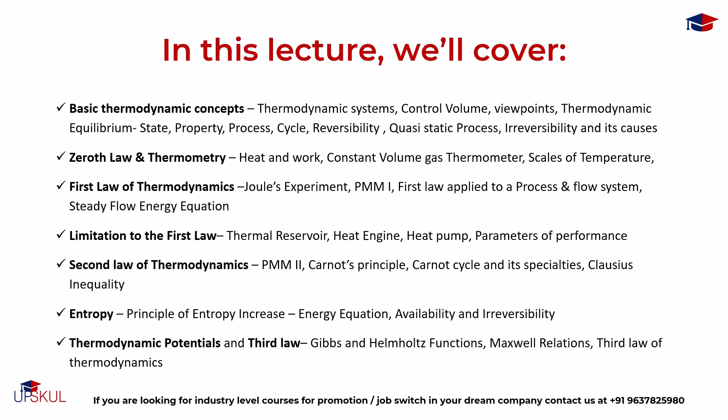We will start this module with the most boring subject, that is thermodynamics. Today we will cover the basic concepts of thermodynamics, Zeroth Law and thermometry, first law of thermodynamics, limitations to the first law, second law of thermodynamics, entropy, and third law, along with real-world applications, and prepare for MCQs and interview questions.

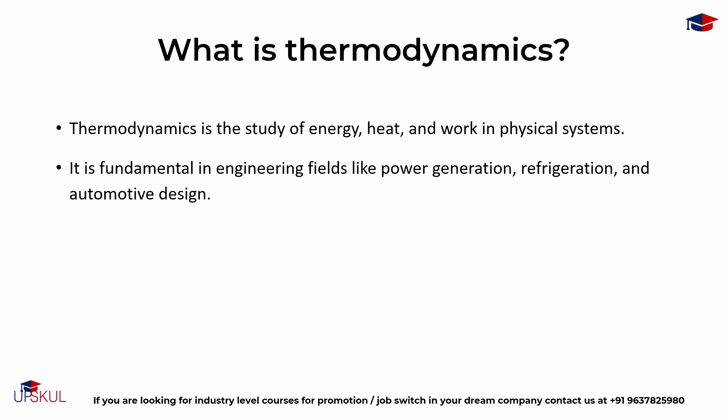A thermodynamic system is defined as the quantity of matter or a region of space which is selected for the study. The mass or region outside the system is called surroundings, and the real or imaginary surfaces which separate the system and the surroundings is called boundary.

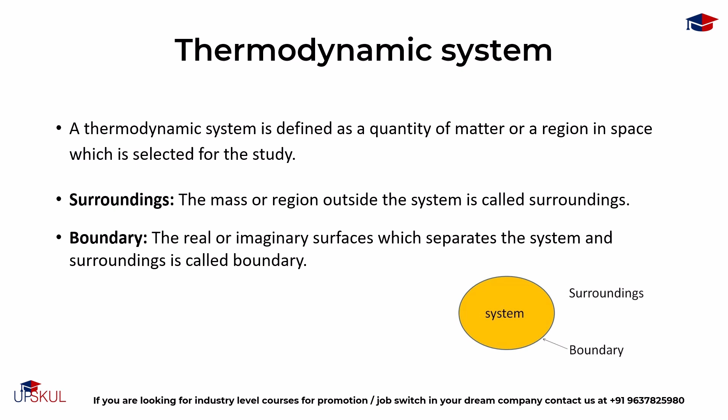Based on mass and energy transfer, the thermodynamic system is divided into 3 types: closed system, open system and isolated system. A system in which the transfer of energy but not mass can take place across the boundary is called a closed system. The mass inside the closed system will remain constant.

For example, boiling of water in a closed vessel. Since the water is boiled in the closed vessel, the mass of water cannot escape the boundary of the system, but heat energy is continuously entering and leaving the boundary of the vessel. This is an example of closed system.

Next, a system in which the transfer of both mass and energy takes place is called an open system. This system is also known as control volume. Boiling of water in an open vessel is an example of open system because the water and heat energy both enter and leave the boundary of the vessel.

Then a system in which the transfer of mass and energy cannot take place is called an isolated system, like tea present in a thermos flask, because in this the heat and mass of the tea cannot cross the boundary of the thermos flask. Therefore, it is an isolated system.

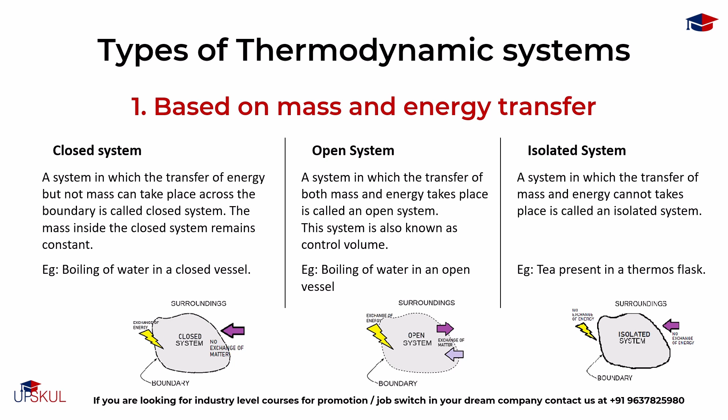Based on composition, there can be homogeneous and heterogeneous systems. A system which contains only one single phase is called a homogeneous system. For example, mixture of air and water vapor. They are both in gaseous form, right?

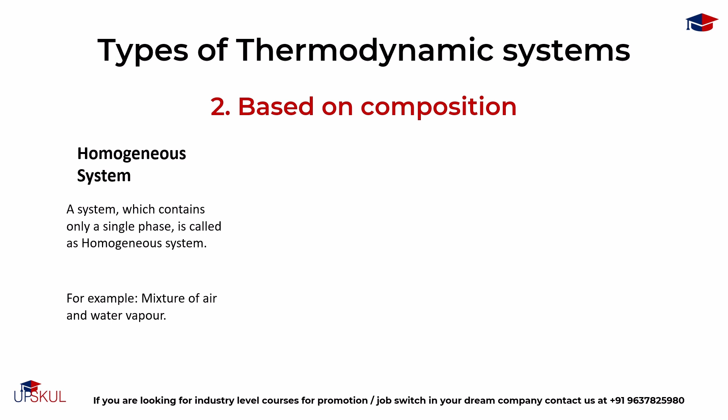Then a system which consists of more than one phase is called a heterogeneous system, like mixture of water and steam. They are both one substance but in different phases.

And then we have the pure substance, a substance with homogeneous and invariable chemical composition, even though change of phase takes place, is called a pure substance. And the simple example of pure substance is water.

Now let's look in detail at what is a control volume.

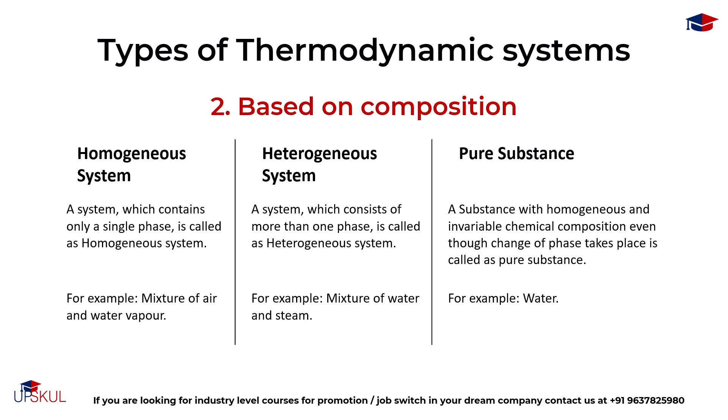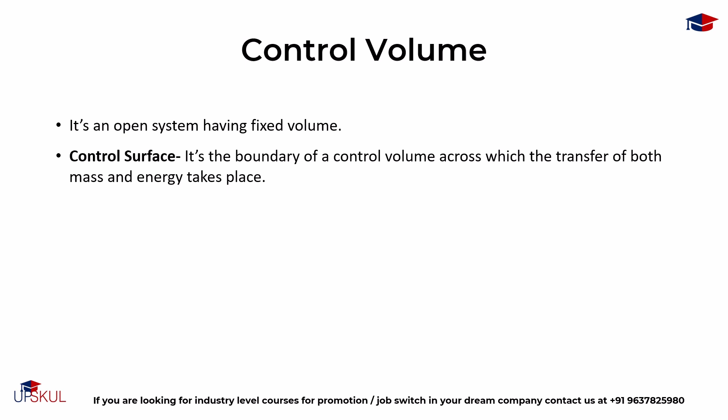A control volume is a system of fixed volume. This type of system is usually referred to as an open system, where mass transfer can take place across a control volume and energy transfer can also occur in and out of the system. A control surface is the boundary of the control volume across which the transfer of both mass and energy can take place. Here, the mass of the control volume may or may not be fixed.

When the net influx of mass across the control surface equals zero, then the mass of the system is fixed, and vice versa. The identity of mass in a control volume always changes, unlike the case of a control mass system or a closed system.

Most engineering devices in general represent an open system or control volume. For example, a heat exchanger, where fluid enters and leaves the system continuously with the transfer of heat across the system boundary. Then there are pumps, where there is a continuous flow of fluid through the system with a transfer of mechanical energy from the surroundings to the system.

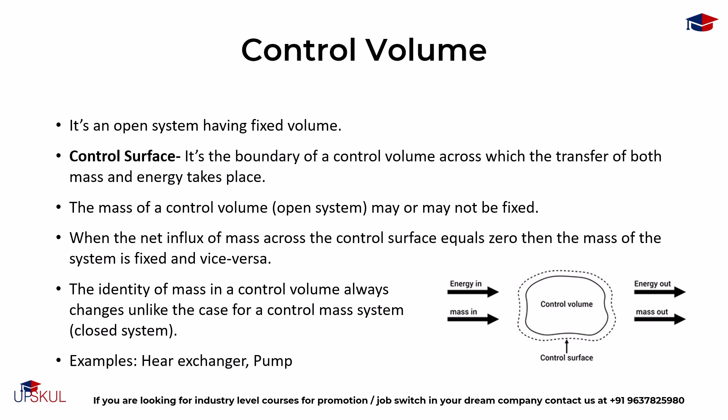Now there are different viewpoints or approaches to a thermodynamic system. In the macroscopic approach, a certain quantity of matter is considered without taking into account the events occurring at the molecular level. Whereas in the microscopic viewpoint, the matter is considered to be comprised of a large number of molecules which randomly move in a chaotic fashion, and the effect of molecular motion is considered.

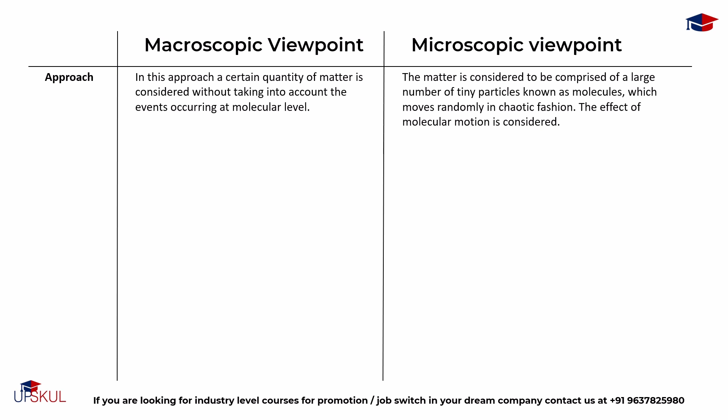In the macroscopic viewpoint, the analysis is concerned with the overall behavior of the system, whereas in the microscopic viewpoint, knowledge of the structure of matter is essential in analyzing the behavior of the system. The application of the macroscopic viewpoint is the study of classical thermodynamics, while the microscopic approach is used in the study of statistical thermodynamics.

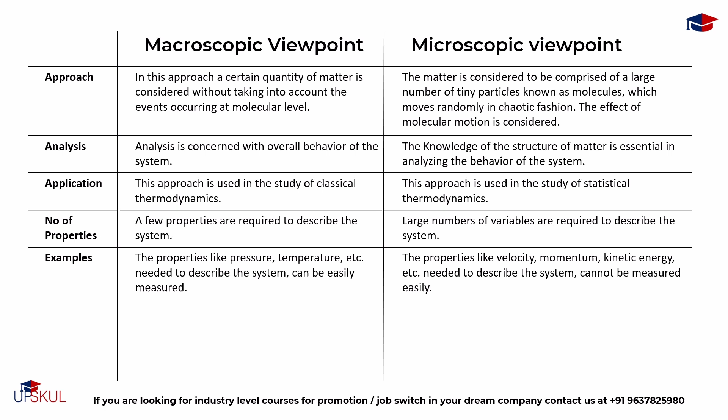Now let's look at examples. In the macroscopic approach, usually all the properties we study in mechanical systems, like pressure and temperature, are used to define a macroscopic system, and there are few properties needed. But in terms of the microscopic viewpoint, there are a large number of variables like velocity, momentum, kinetic energy, and all these have to be described in the system.

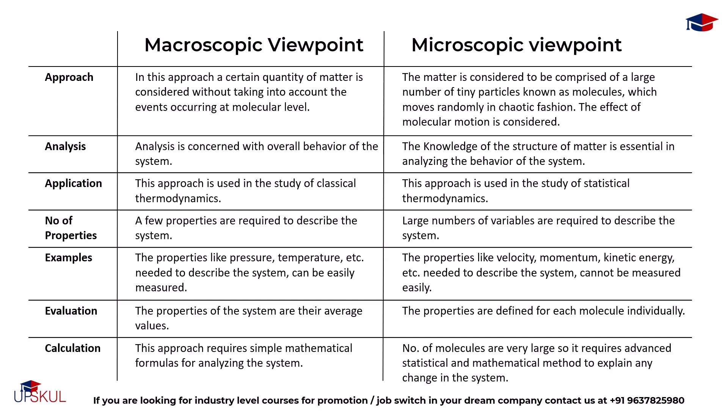These things cannot be measured very easily. So in terms of evaluation and calculation, the macroscopic viewpoint considers the average value of the properties, so they can be calculated using simple mathematical formulas. Whereas in the microscopic viewpoint, the properties must be defined for each molecule individually, and since the number of molecules is very large, it requires advanced statistical and mathematical methods to explain any change in the system.

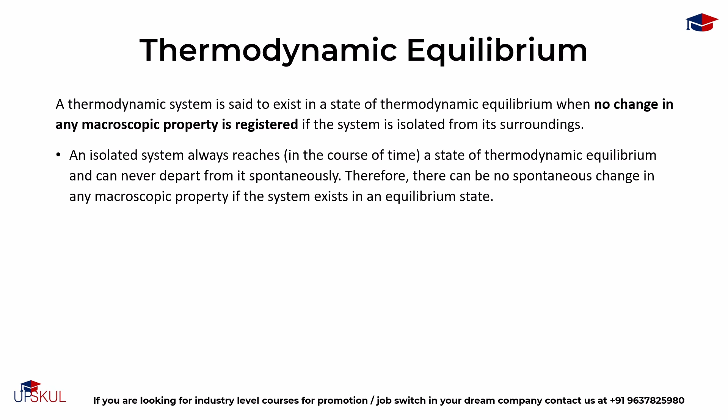Now let's talk about thermodynamic equilibrium. A thermodynamic system is said to exist in a state of thermodynamic equilibrium when no change in the macroscopic property is registered if the system is isolated from its surroundings. An isolated system eventually reaches the state of thermodynamic equilibrium and can never spontaneously depart from it. Therefore, there can be no spontaneous change in the macroscopic property if the system exists in an equilibrium state.

A thermodynamic system will be in an equilibrium state if the system is in a state of mechanical equilibrium, chemical equilibrium, and thermal equilibrium. That means there is no change in pressure, chemical composition, or temperature in the system.

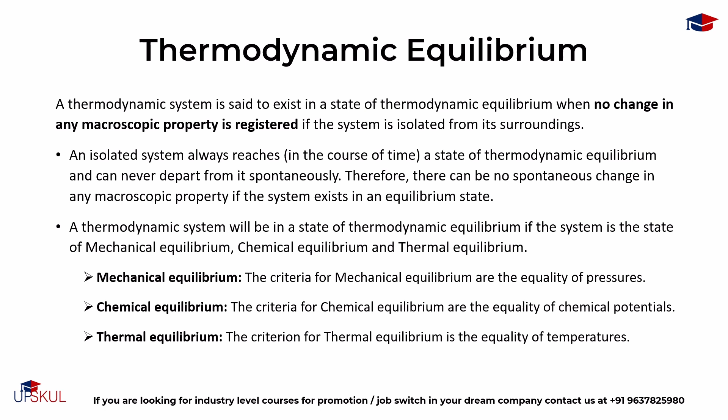The thermodynamic state of a system is defined by specifying values of a set of measurable properties sufficient to determine all other properties. For fluid systems, typical properties are pressure, volume, and temperature. For more complex systems, we may require specification of unusual properties, like the state of an electric battery requires specification of the amount of electric charge it contains.

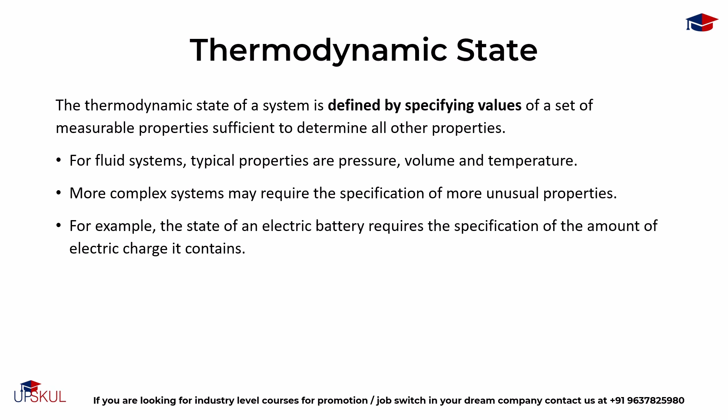Thermodynamic properties may be either extensive or intensive. The properties which are independent of the mass of the system are called intensive properties; for example, temperature, pressure, and density. But the properties which depend on the size or extent of the system are called extensive properties, that is, total mass, total volume, and total momentum of the system. These are very simple concepts, and we are just going through them one by one.

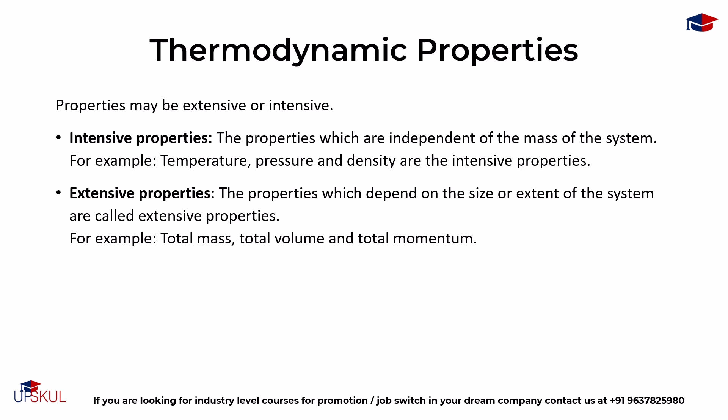Next is the thermodynamic process. When the system undergoes a change from one thermodynamic state to a final state due to change in properties like temperature, pressure, volume, etc., the system is said to have undergone a thermodynamic process.

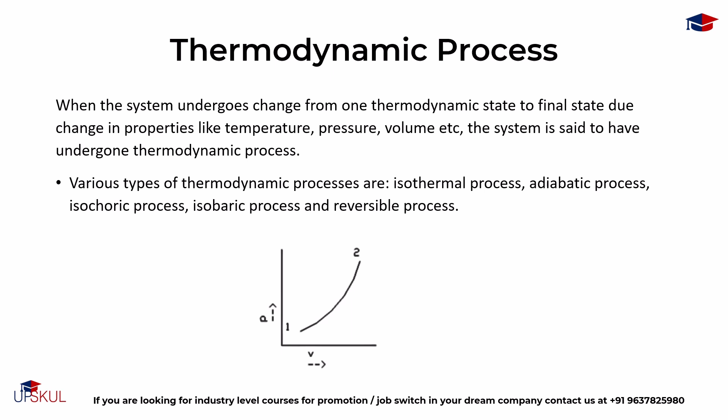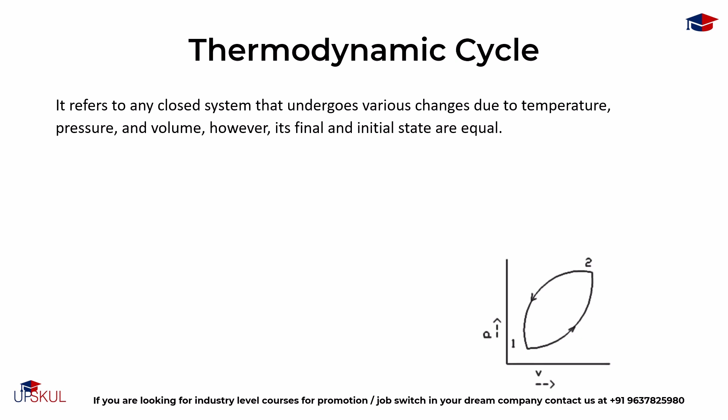There are various types of thermodynamic processes like isothermal, adiabatic, isochoric, or isobaric process, and reversible processes. Next is thermodynamic cycle. It refers to any closed system that undergoes various changes due to temperature, pressure, and volume. However, its final and initial state are equal.

This cycle is important as it allows for a continuous process of moving piston seen in heat engines, and expansion compression of the working fluid in refrigerators. For example, without the cyclical process, a car would not be able to continuously move when fuel is added, or a refrigerator would not be able to stay cold.

Visually, any thermodynamic cycle will appear as a closed loop in a pressure volume diagram. For example, Otto cycle, diesel cycle, and Brayton cycle, etc. We will learn about them in the next session, that is on power cycles.

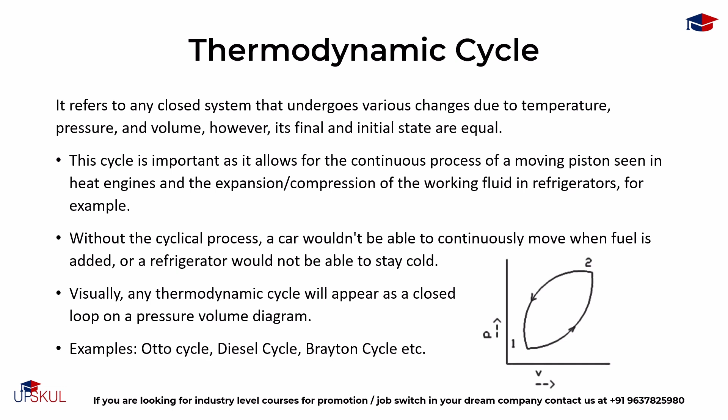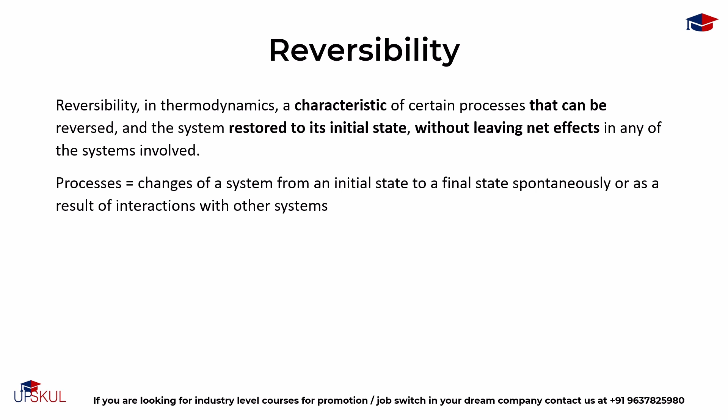Now coming to reversibility. It is a characteristic of certain changes that can be reversed and the system restored to its initial state without leaving any net effects in any of the systems involved. That means if there are changes in a system from initial state to a final state spontaneously or as a result of interactions with other systems, then those changes have to come back to their initial state without losing any of it. Let's take an example of a single swing of a frictionless pendulum from one of its extreme positions to another.

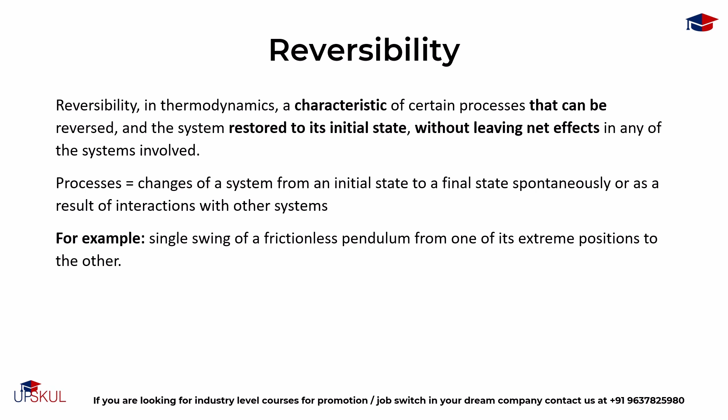Now what happens? The swing of the real pendulum is irreversible because a small amount of mechanical energy of the pendulum would be expended in performing work against frictional forces, and restoration of the pendulum to its exact starting position would require the supply of an equivalent amount of energy from a second system, such as a compressed spring, in which the irreversible change of state would occur.

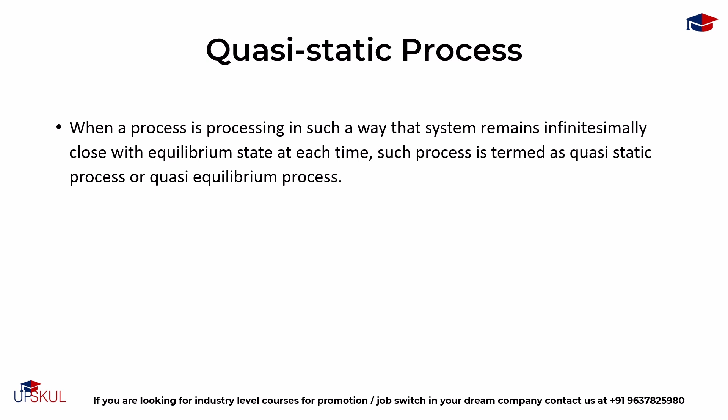Now, when a process is proceeding in such a way that the system will remain infinitesimally close to the equilibrium state at each time, such a process is called a quasistatic process or a quasi-equilibrium process. In simple words, if a system is undergoing a thermodynamic process through a succession of thermodynamic states and each state is an equilibrium state, then the process will be termed a quasistatic process.

Let us consider a simple example for better understanding of a quasistatic process. If a person is coming down from the roof to the ground floor, he has two ways. Either he can come down with the help of a ladder or stairs, then it will be considered a quasistatic process. But if he jumps from the roof to the ground floor, then it will not be called a quasistatic process.

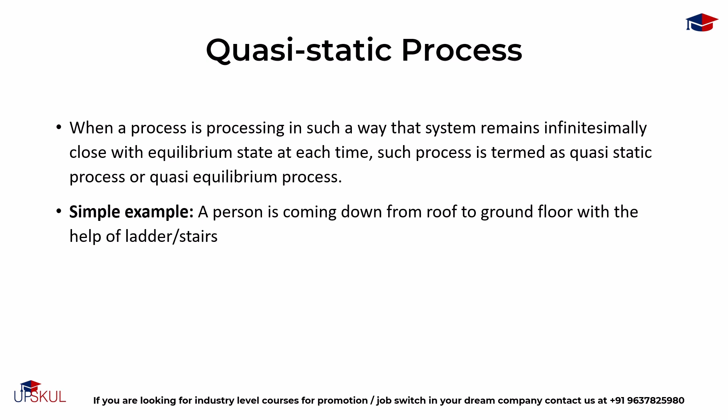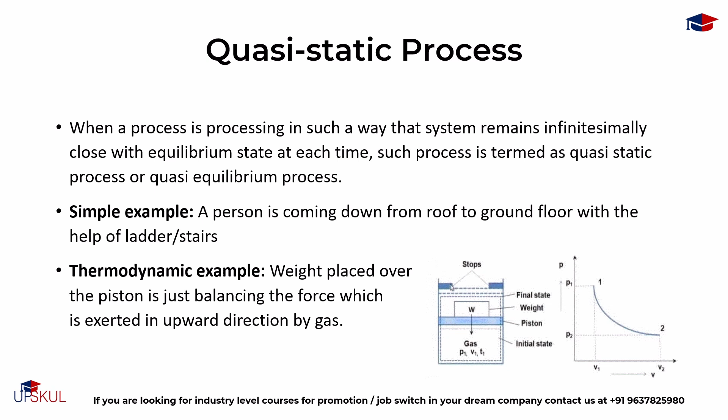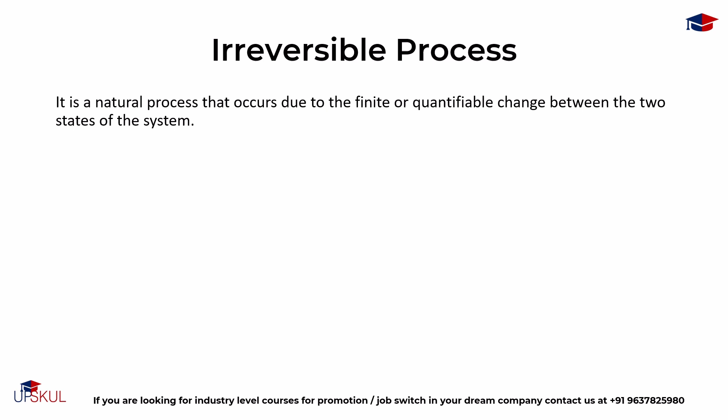Now let's look at what is an irreversible process. It can also be called a natural process because all the processes occurring in nature are irreversible. A natural process occurs due to the finite gradient between the two states of the system. For instance, heat flow between two bodies occurs due to the temperature gradient between them. This is the natural flow of heat. Similarly, water flows from high level to low level, and current moves from high potential to low potential.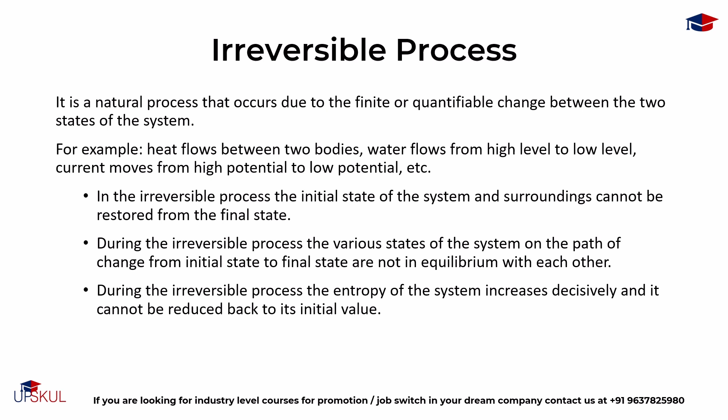So in the irreversible process, the initial state of the system and surroundings cannot be restored from the final state. During the irreversible process, the various states of the system on the path of change from initial to final are not in equilibrium with each other, and the entropy of the system increases decisively and cannot be reduced back to its initial value. We will study about entropy in the next section. This phenomenon of the system undergoing an irreversible process is called irreversibility.

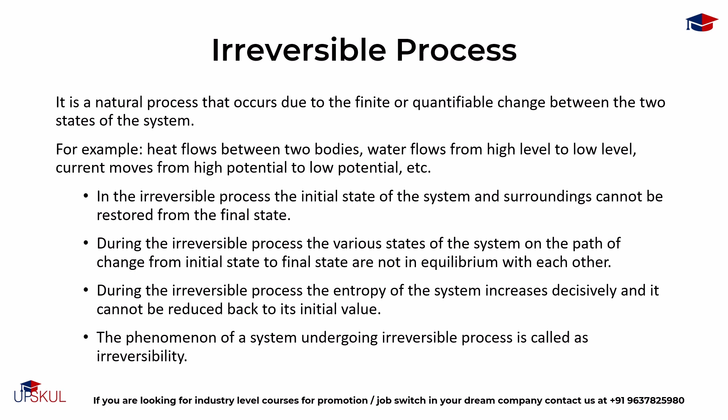But what causes this irreversibility? First is friction, and friction is invariably present in real systems. It causes irreversibility in the process as work done does not show an equivalent rise in the kinetic or potential energy of the system.

So the fraction of energy wasted due to frictional effects leads to deviation from the reversible states.

Next is free expansion, which refers to unresisted expansion such as expansion in a vacuum. During this, the work interaction is zero, and without the expense of any work, it is not possible to restore the initial states. Thus, free expansion is also irreversible.

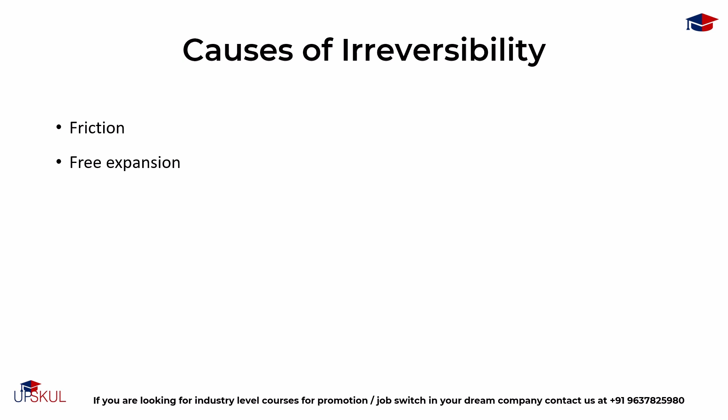Next, irreversibility happens during heat transfer through a finite temperature difference. Heat transfer occurs only when there is a temperature difference between bodies undergoing heat transfer. During the heat transfer, if heat addition is carried out in a finite number of steps, then after every step, the new state shall be a non-equilibrium state.

Simply imagine a hot cup of coffee and a cold glass of water. The temperature difference between them is finite because the coffee is warmer than the water. So finite here means quantifiable. This difference causes heat to flow from coffee to the water, a process that is not perfectly reversible.

Then irreversibilities are introduced due to lack of thermodynamic equilibrium during the process. Non-equilibrium may be due to mechanical inequilibrium, chemical inequilibrium, thermal inequilibrium, or electrical inequilibrium. And the irreversibility will be called mechanical irreversibility, thermal irreversibility, and so on. These factors we have discussed are also causing non-equilibrium during the process, and therefore they make the process irreversible.

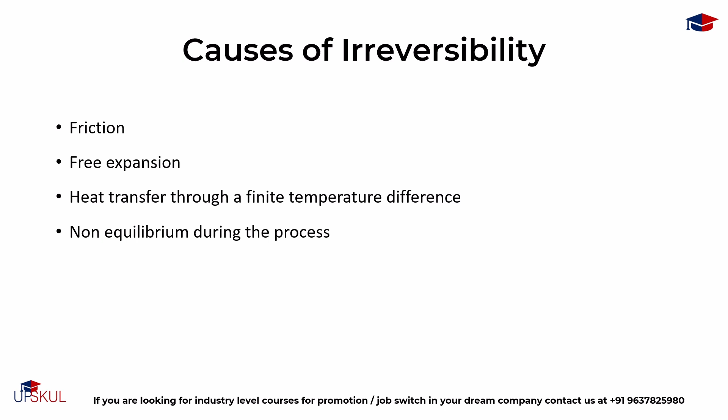So what is this heat and work that we have been discussing for some time now? Heat is the energy in transition between the system and the surroundings by virtue of the difference in temperature. That is, heat is the energy transferred from one system to another solely by the reason of a temperature difference between the systems. Heat exists only as it crosses the boundary of the system, and the direction of heat transfer is from higher temperature to lower temperature.

For thermodynamic sign convention, heat transfer to a system is positive and heat transferred from the system is negative. That makes the calculation very easy when we are considering the system.

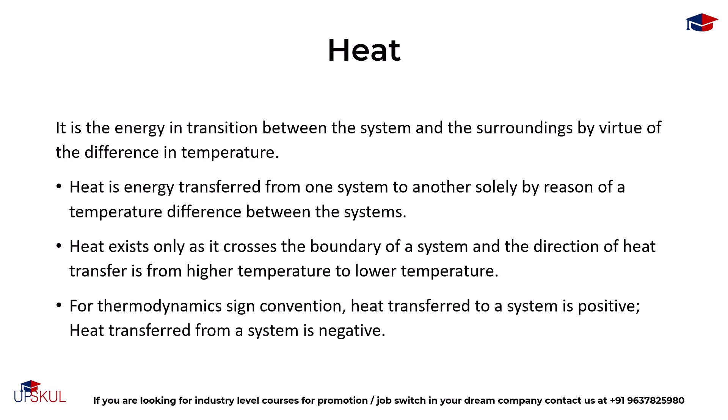Now, what is the thermodynamic definition of work? Positive work is done by a system when the sole effect external to the system could be reduced to the rise of a weight. So work done by the system is positive, and work done on the system is negative.

There can be different types of work interaction, like expansion and compression work, which we call displacement work, or PdV work. Then there's work of a reversible chemical cell, work in stretching of a liquid surface, work done on elastic solids, and work done during polarization and magnetization. In mechanical systems, we mostly deal with displacement work.

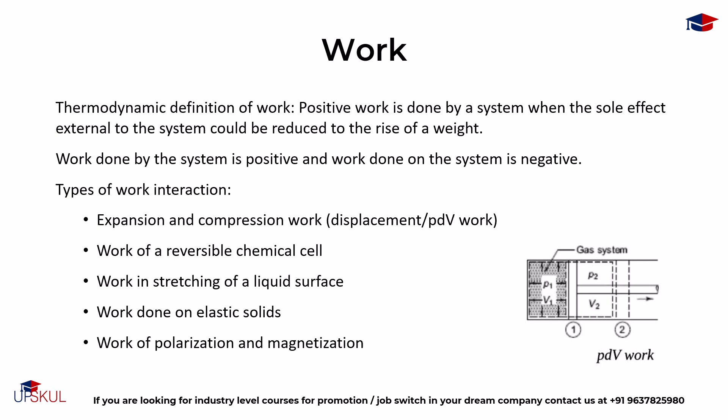Now, what are point and path functions? A point function does not depend on the history of the system, it only depends on the state of the system. For example, temperature, pressure, density, mass, volume, enthalpy, entropy, internal energy, etc. But the path function depends on the history of the system, or the path by which the system has arrived at a given state.

For example, work and heat are path functions. Path functions are not properties of the system, while point functions are properties of the system. The change in a point function can be obtained from the initial and final values of the function, whereas the path has to be defined in order to evaluate the path functions.

For example, we have discussed different types of work. When we want to calculate work done by a system, we have to define what kind of work it is. If it is a displacement system, then we have to calculate the displacement, and based on that, we can calculate the work done by the system.

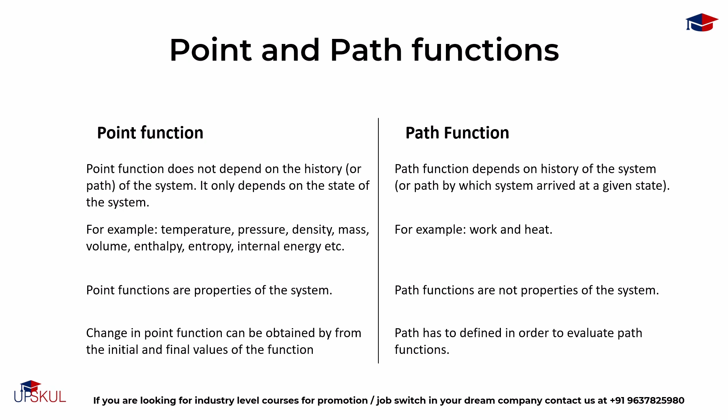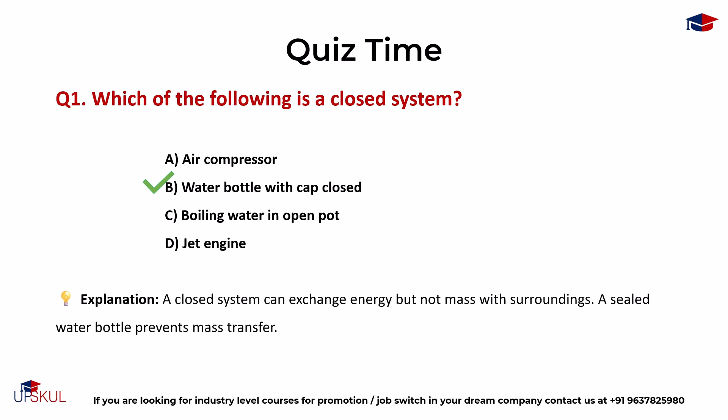Which of the following is an intensive property? Volume, mass, temperature, or energy? Now, intensive properties do not depend on the mass or size of the system.

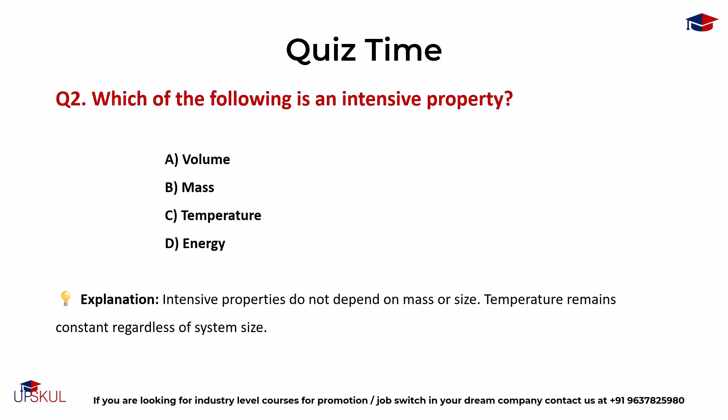Except for the others, only temperature remains constant regardless of the system size. So the right answer is C, temperature.

Question 3: Thermodynamic equilibrium means the system has equal pressure throughout, no unbalanced forces, equal temperature and no chemical potential gradients, or all of the above. We discussed that a system will have thermodynamic equilibrium only when it has mechanical, thermal and chemical equilibrium simultaneously. So the answer is D, all of the above.

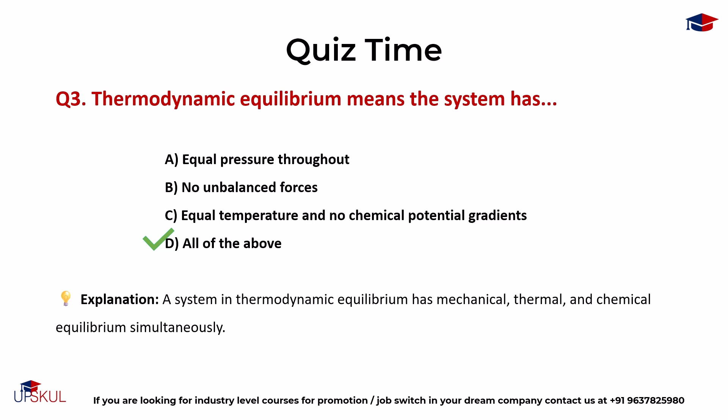Fourth, a process is called quasistatic if it occurs A. instantly, B. with high velocity, C. very slowly, D. with shock waves. By definition, a quasistatic process proceeds infinitesimally slowly, maintaining internal equilibrium. So the correct answer is C, very slowly.

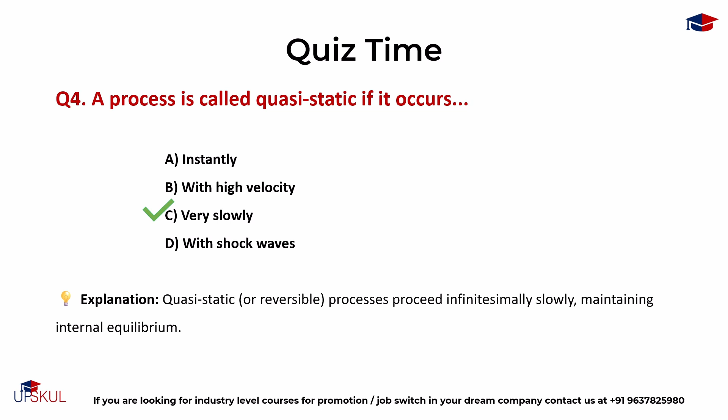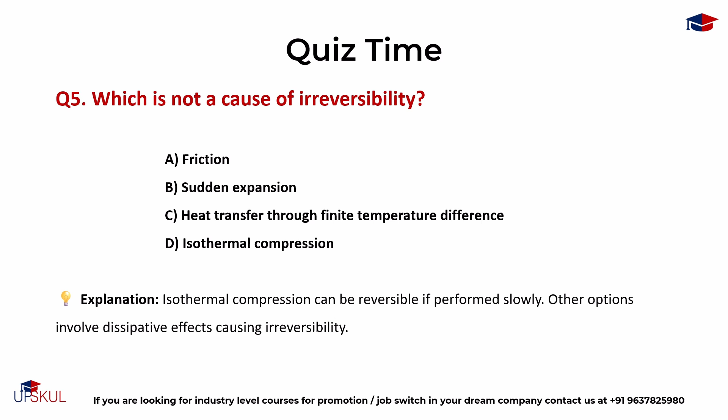Question 5: Which is not a cause of irreversibility? A. friction, B. sudden expansion, C. heat transfer through finite temperature difference, and D. isothermal compression. Isothermal compression can be reversed if performed very slowly, but the other options involve dissipative effects causing irreversibility. So the correct answer is D, isothermal compression.

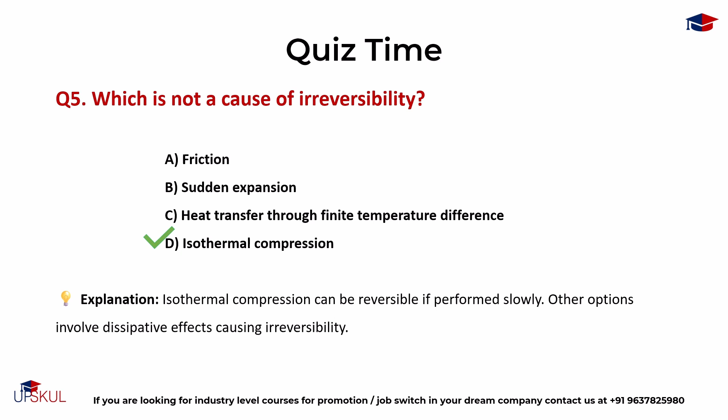Question 6: Which of the following is a point function? A. work, B. heat, C. pressure, and D. none of the above. Point functions depend only on state, not path. Pressure is a state property, while work and heat are path functions. So here the correct answer will be C, pressure.

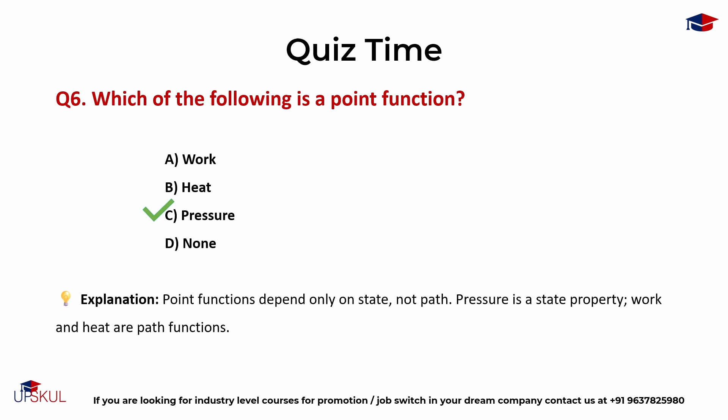These are some common interview questions which you can now very easily answer. So practice it well.

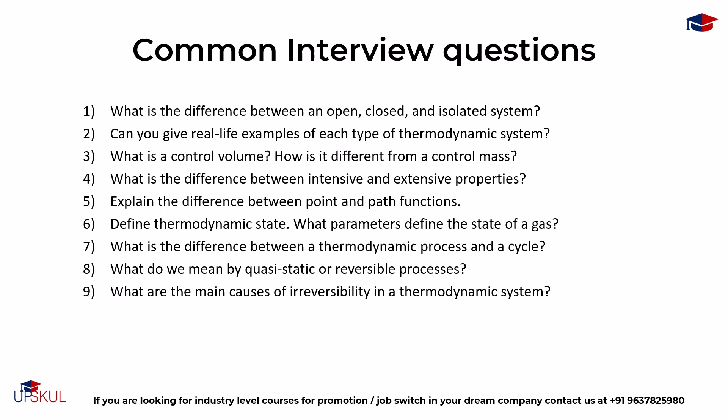Now moving on to the next section on Zeroth Law and thermometry. The Zeroth Law of thermodynamics says that if two systems are at the same time in thermal equilibrium with a third system, then they are in equilibrium with each other. This forms the basis of temperature measurement, applied in thermometers and temperature calibration. When an object with a higher temperature comes in contact with an object of lower temperature, it will transfer heat to the lower temperature object, such that the objects will approach the same temperature and maintain a single constant temperature in absence of other losses. That is how thermal equilibrium is attained.

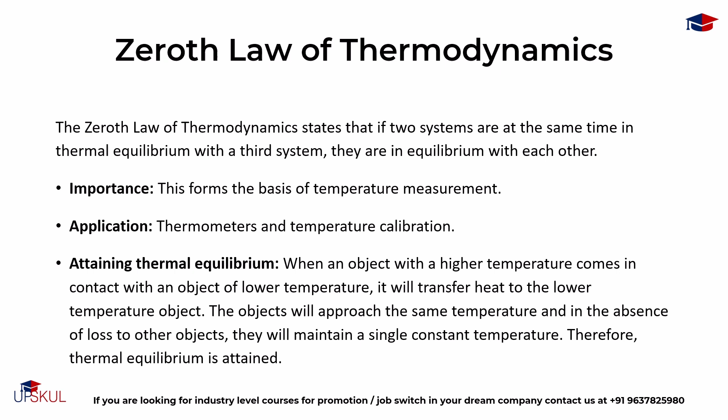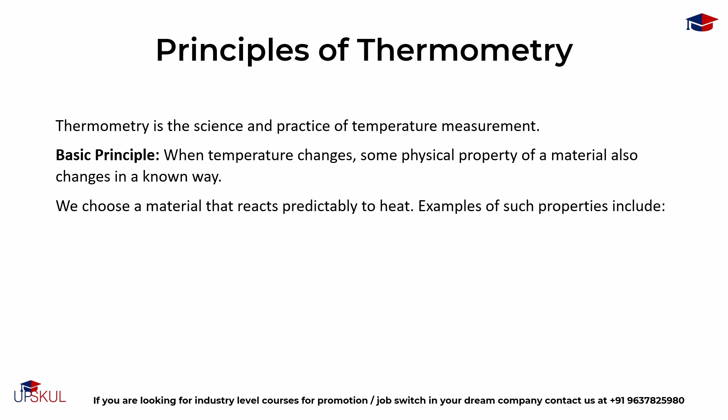Thermometry is the science and practice of temperature measurement. It works on a simple idea that when temperature changes, some physical property of material also changes in a known way. We choose a material that reacts predictably to heat, for example mercury expanding in a glass tube, electrical resistance, and pressure of gas at constant volume. By measuring the change in that property, we can find the temperature. This measured value is then compared to a standard scale.

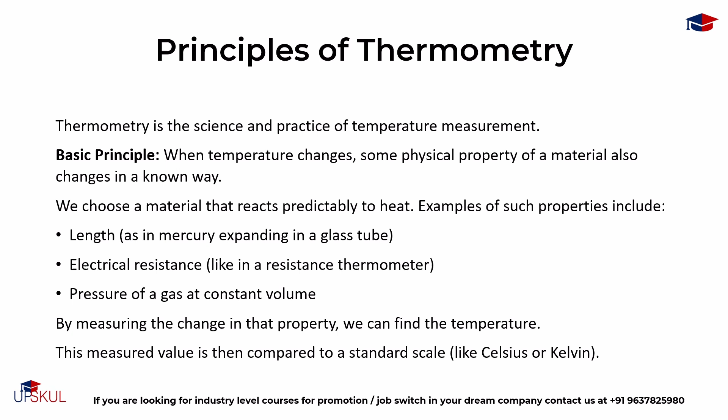Before understanding the different scales, first let's understand the Zeroth Law with some common interview questions.

What is the Zeroth Law of thermodynamics and why is it important? The Zeroth Law simply says that if there are three objects A, B and C such that the temperature of A equals temperature of B, and temperature of B equals temperature of C, then the temperature of A equals the temperature of C. That is, all three have the same temperature. This is important because it forms the basis of comparison of temperatures.

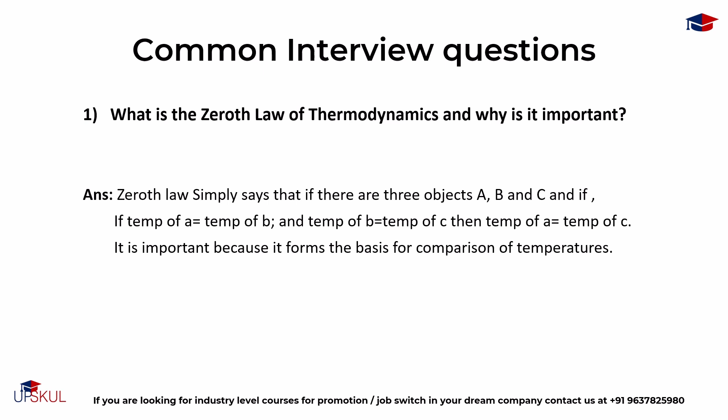How does the Zeroth Law define thermal equilibrium? The Zeroth Law defines thermal equilibrium as the state where two systems have the same temperature and no heat transfer occurs between them.

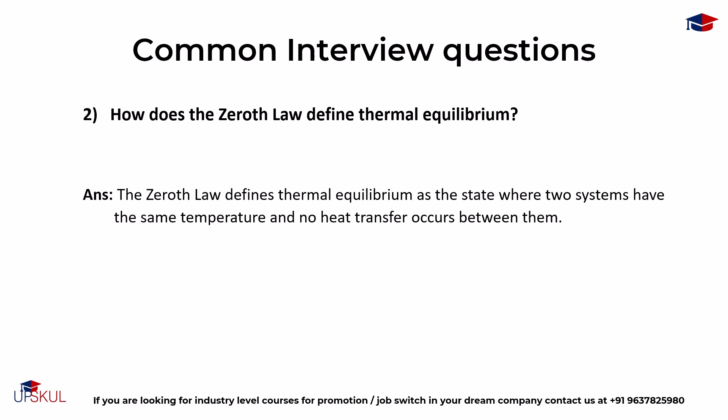Why was the Zeroth Law introduced later than the first and second law? This is also why it is called the Zeroth Law, because while the first and second laws were being developed, the concept of temperature and its role in determining thermal equilibrium was not clear. So the Zeroth Law, which essentially defines thermal equilibrium, was later recognized as the necessary foundation for understanding thermodynamics, and therefore it is called the Zeroth Law, because the first and second laws were already defined at that time.

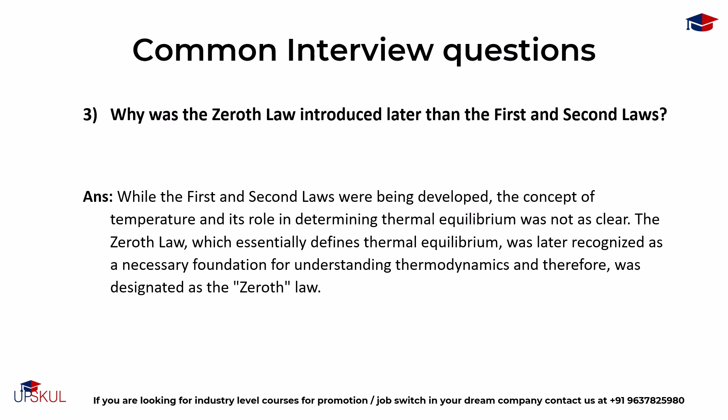How does the Zeroth Law help in temperature measurement? The Zeroth Law allows us to define temperature as a measurable quantity because it establishes that systems in thermal equilibrium share a common temperature. This is the basis for all temperature measurements, including the use of thermometers. Thermometers work by using a temperature dependent property to indicate temperature, and the Zeroth Law ensures that if the thermometer and the object being measured are in thermal equilibrium, the thermometer's reading accurately reflects the object's temperature.

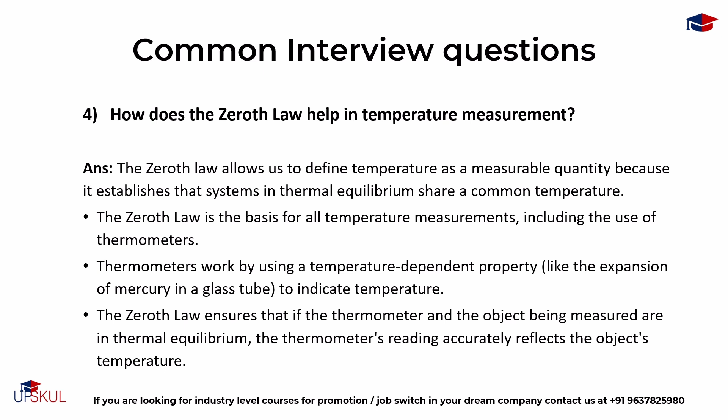Can the Zeroth Law be applied to all physical systems? Simply, no. The Zeroth Law of thermodynamics is not directly applicable to all physical systems. It does not apply to systems that are not in thermal equilibrium or where heat transfer is not relevant, nor does it address physical interactions like gravitational, electromagnetic or nuclear forces which may govern certain systems. The Zeroth Law is a foundational concept in thermodynamics, but it is not a comprehensive description of all physical systems.

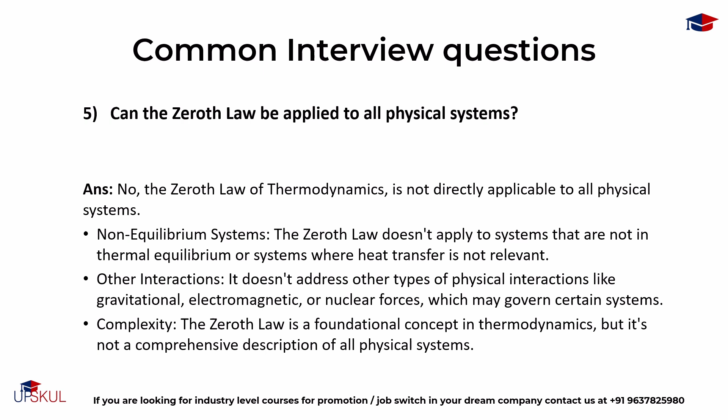So what is a constant volume gas thermometer? It is a precise instrument used to measure temperature based on pressure changes on a fixed amount of gas kept at a constant volume. The key principle is based on the ideal gas law, which states that at constant volume and gas quantity, pressure is directly proportional to temperature. As the temperature increases, the pressure of the gas inside the sealed bulb also increases proportionally, since gas quantity and volume are constant. So we can simply calculate the temperature by measuring the pressure.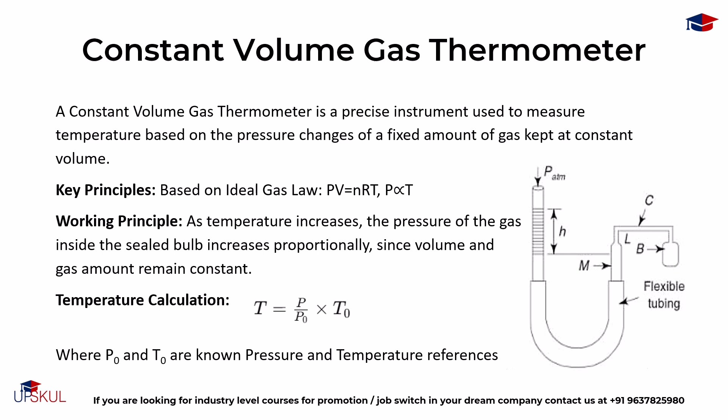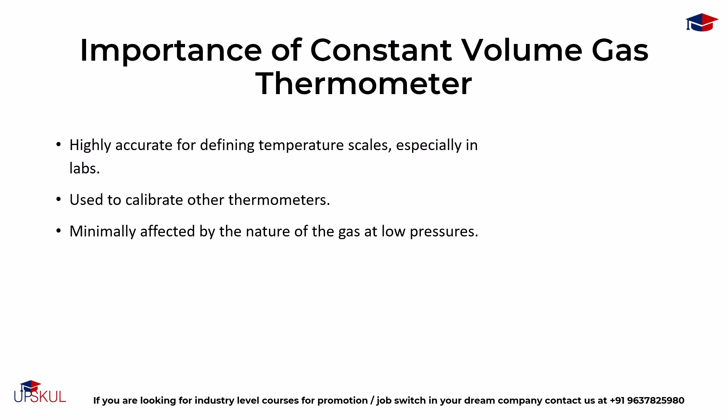This is the formula, where P0 and T0 are known reference pressure and temperature. Now why is this important? Because it is highly accurate for defining temperature scales, especially in labs. It is used to calibrate all other thermometers, and it is very minimally affected by the nature of the gas at low pressures. Now imagine inflating a tire at a constant size. If the tire is exposed to heat, the pressure rises, and that change in pressure tells us how hot the environment is. This is the essence of how a constant volume gas thermometer works.

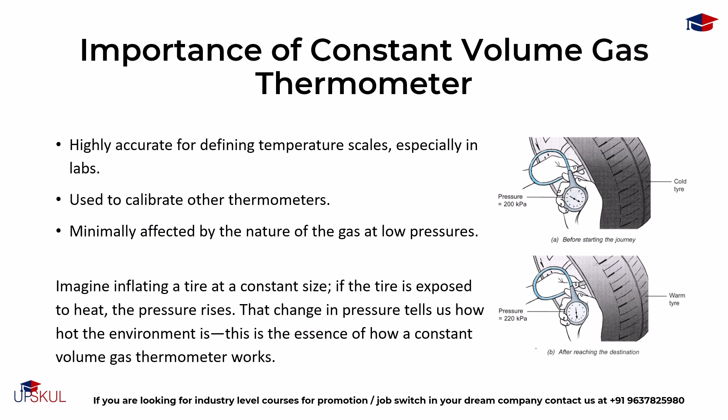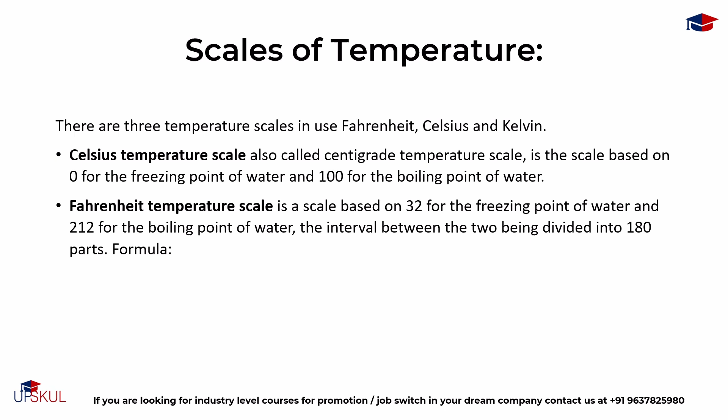Now there are three temperature scales used: Celsius, Fahrenheit and Kelvin. The Celsius scale, also called the centigrade scale, is the simplest. It is based on a reading of 0 for the freezing point of water and 100 for the boiling point of water. The Fahrenheit scale is based on 32 for the freezing point and 212 for the boiling point of water. This is the conversion formula: F equals 9 by 5 C plus 32.

The Kelvin temperature scale is the base unit of thermodynamic temperature measurement in the International System of Measurements. It is defined as 1 by 273.16 of the triple point of water. The triple point is the equilibrium among the solid, liquid and gaseous phases of pure water.

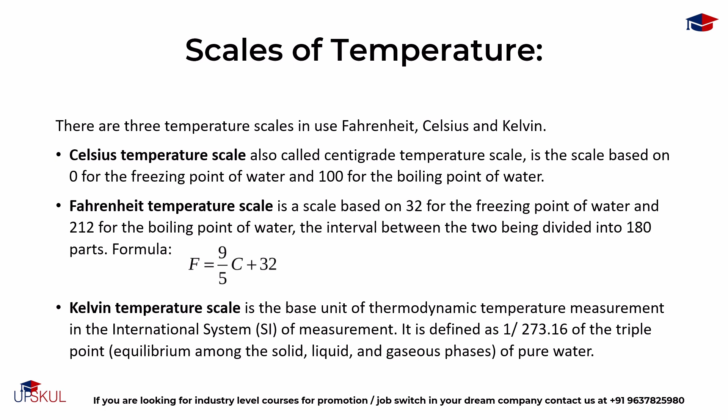Now let's look at some common MCQ questions on the Zeroth Law. Question 1: The Zeroth Law of thermodynamics helps define A. Heat transfer direction, B. Internal energy, C. Temperature, D. Entropy. Answer is C, Temperature.

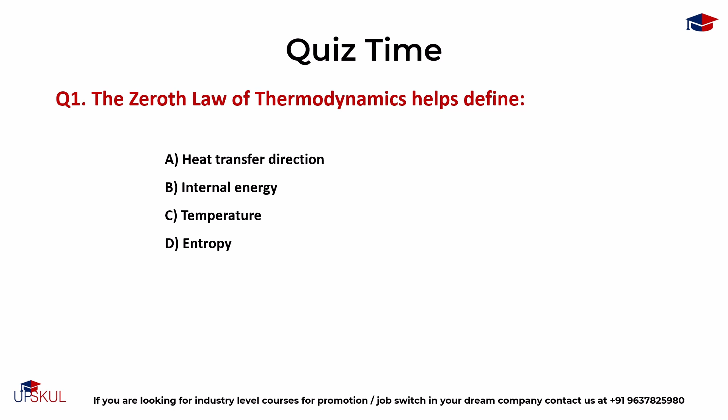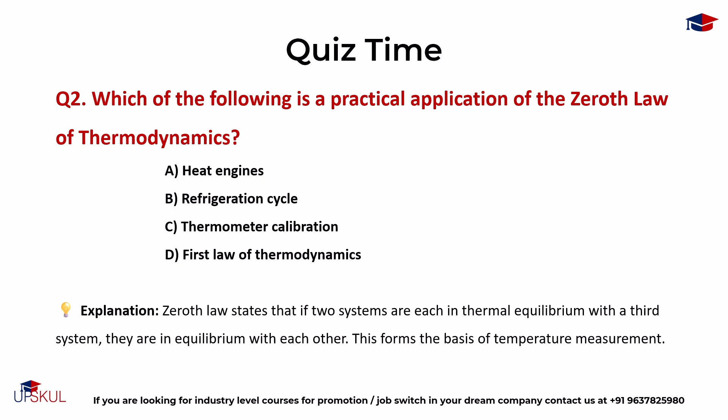Which of the following is a practical application of the Zeroth Law of thermodynamics: Heat engines, refrigeration cycle, thermometer calibration, or first law of thermodynamics? Obviously, thermometer calibration.

Question 3: In a constant volume thermometer, what physical quantity is measured directly? A. Volume, B. Temperature, C. Pressure, D. Heat. At constant volume, pressure is directly proportional to the temperature, therefore pressure is measured to determine temperature. So the correct answer is C.

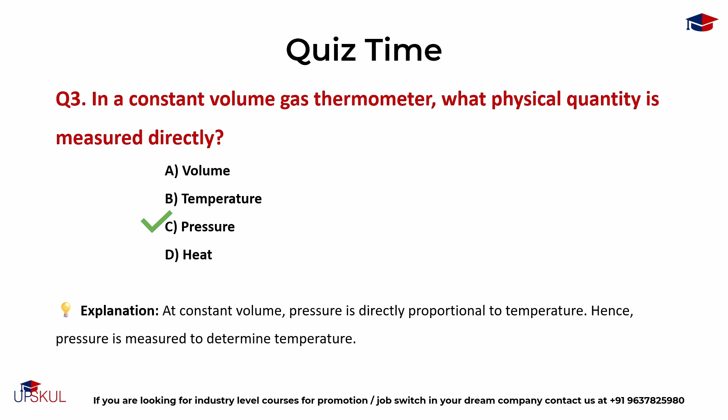Pressure. Question 4: The temperature scale that assigns 0 degree to the freezing point of water and 100 degree to the boiling point is A. Kelvin, B. Fahrenheit, C. Celsius, D. Rankine. Correct answer is C.

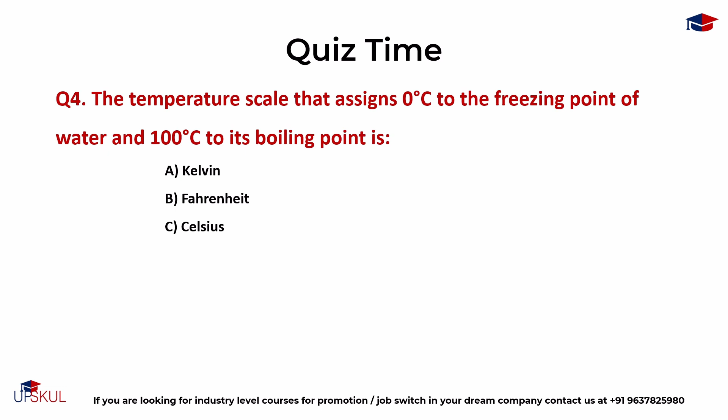Which scale of temperature is an absolute scale based on thermodynamic principles? This too we know: it is the Kelvin scale, because Kelvin is the SI unit of temperature and it starts from absolute zero. The Kelvin scale is based on thermodynamic laws, not material properties.

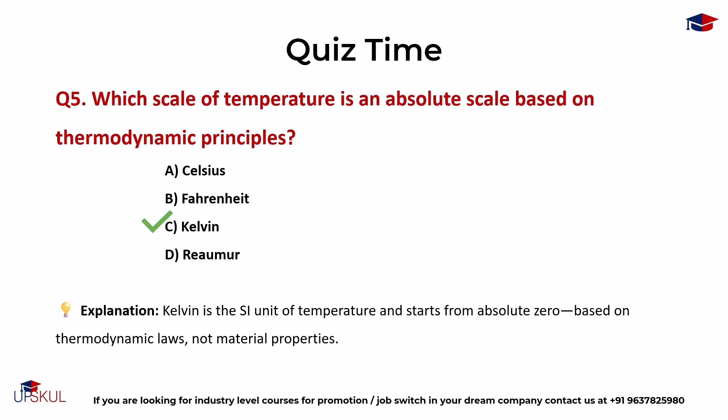Which statement is true for a constant volume gas thermometer at low pressure? A. Pressure remains constant regardless of temperature. B. Pressure is directly proportional to temperature. C. Volume changes with pressure. D. It measures entropy. The answer is B, pressure is directly proportional to temperature, because it is based on the ideal gas law.

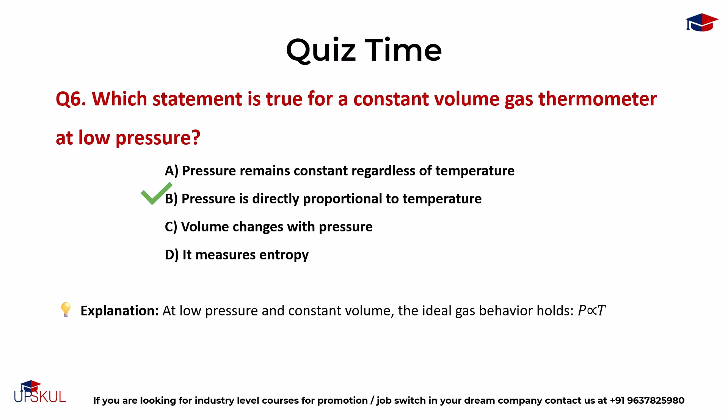Question 7: What is the advantage of using a constant volume gas thermometer? A. It is portable and inexpensive. B. It is highly accurate and independent of the type of gas. C. Works only at high pressures. D. Can measure internal energy. Correct answer is B, highly accurate and independent of the type of gas used, because at low pressures, real gases behave nearly ideally, making the thermometer accurate and less sensitive to gas type.